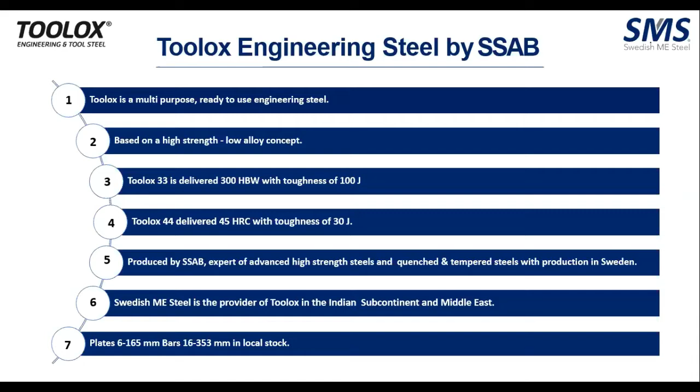So let's go into the process. Toolox has been manufactured not based on ingot casting or electric arc furnace. We have been using virgin material and blast furnace. So the quality of the process is intact from the start.

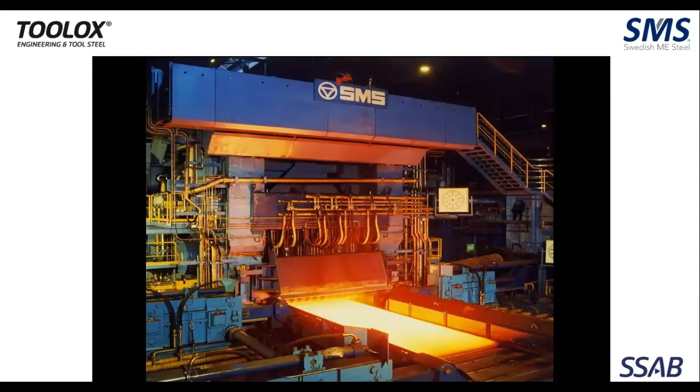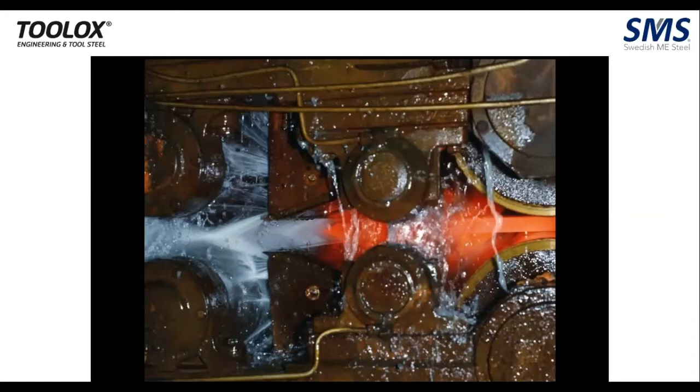This is the slab coming out of the rolling mill, and this is where the entire R&D of Toolox lies. When we say Toolox is from 6 mm to 165 mm, the entire plate thickness is being rolled. No block of Toolox is being forged. Every item, the plate and bars up to 353 mm, it is all rolled plates.

So what you get out of Toolox is guaranteed toughness and chemical composition.

This is where the entire R&D of Toolox manufacturing happens. You can see the red hot condition slab comes out and it changes to room temperature within a matter of seconds. For various thickness plates, the amount and quantity of water to be quenched at what angle, at different quantities, defines the properties of Toolox. That's where the entire R&D happens.

As we have already said, you have a material which is pre-hardened at 45 HRC, with high toughness as well as high tensile properties. It can be used in a wide range of applications. Of course, today our focus is mainly going to be in the range of plastic molds.

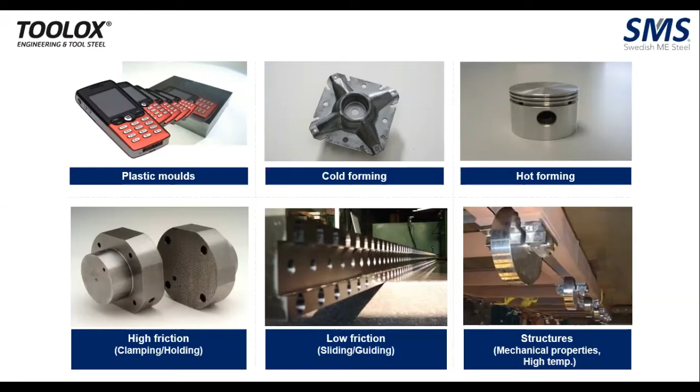When you machine a normal P20 block, the amount of carbides is 10%, whereas in Toolox 33 it is almost half, only 6.4%. This helps you because if you're using the same tooling as for P20, with Toolox you can either increase your milling speed by 40%, or keep the speed constant and increase the insert life.

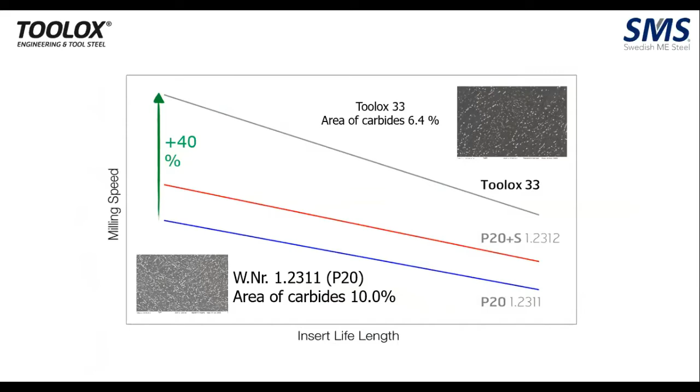Now we look into what we need to do regarding manufacturing time when you manufacture an H13 insert and then use Toolox 44 instead. When you manufacture an H13 insert from raw material to finished product versus Toolox 44, the definitive advantage is that it's delivered at 45 HRC, so there's no two-time machining, annealed and after heat treatment. It's only one-time programming, you can directly go for your final CNC. Of course, with the metal at 45 HRC, the EDM time is very high.

But when you take the total time from raw material to finished product, you'll find you save at least 25 to 30% of your total manufacturing time. Adding to that, you'll save time in heat treatment as well as the treatment cost involved.

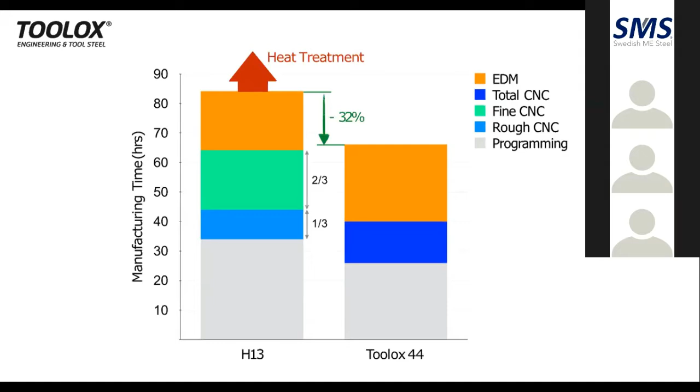This gives you a representation of the two grades compared with a regular P20. Toolox 33 can work against your normal P20, and Toolox 44 can replace your H13, your D2, or any hot and cold working steel you think of.

As we have been repeatedly saying, the properties given on behalf of Toolox are guaranteed. I don't think any other supplier guarantees mechanical properties of the material. So we at Toolox take great pride in saying that.

It comes with ESR properties as standard. Toolox 44 is an ESR property material. You can see the carbon equivalent of the material is very low, the lowest, bottommost row, which states the lesser the value of the carbon equivalent, the greater your material's ability to adapt to both welding and thermal cutting. This makes your maintenance very easy. That's the whole point behind it.

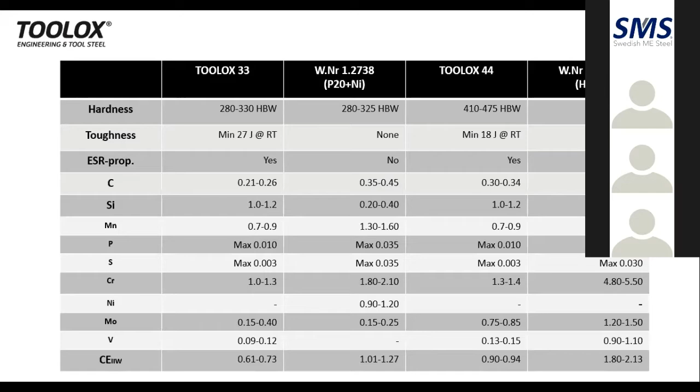When we say that Toolox is delivered at 45 HRC and no heat treatment is required, there's always a doubt or curious question of how you'll be able to machine it being at 45 HRC. Yes, those kinds of doubts, I think, will be clear after seeing these machining parameters and videos. But if you use the recommended tooling that you're going to see, we are rest assured you'll be able to overcome this machining block that you have in your mind.

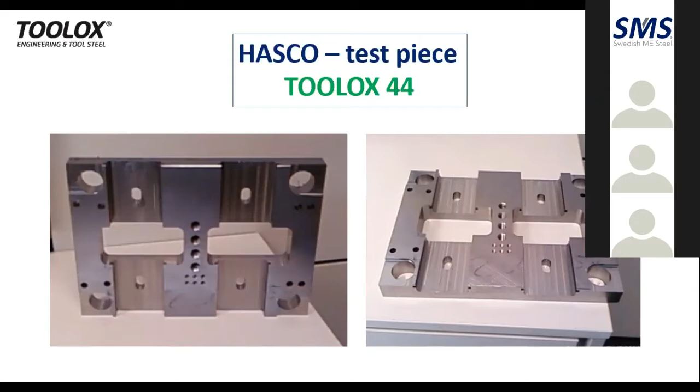This is the Hasco test piece. Hasco, as many of you know, is a prominent mold-base supplier in Europe, and they have placed Toolox in their own brochure. You can just Google Hasco and Toolox, and you'll find that Hasco recommends Toolox in their own brochure. This is a test piece that Hasco has done, and this is the comparison they make.

When they compare a normal P20 with a regular Toolox 33, even though you buy the material at 40% more cost, the final total cost after 70 hours of machining shows that the total machining hours is still cheaper than your regular P20.

Toolox is an internally stress-relieved block, so there are no internal stresses in the block. Whatever extensive machining you do with the Toolox block, it doesn't get work hardened and it comes out in the form of chips. So even after extensive machining, no stress relieving is required.

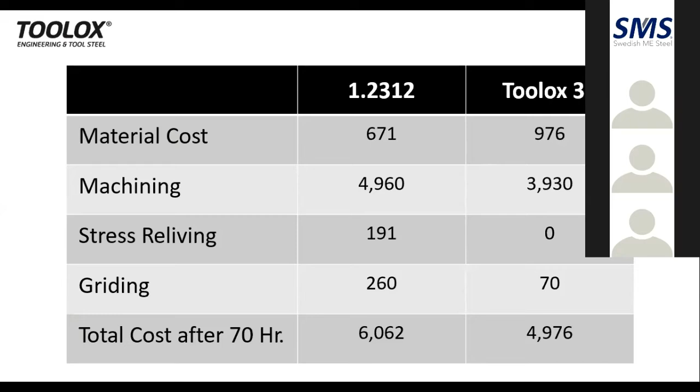These are some of the machining results of Toolox 44 while machining the 45 HRC material. They say milling with average speeds for hard milling is possible, long hole drilling is possible, and the test piece was absolutely stress-free -- the point we stressed in the previous slide, which Hasco also concurs with. Usage of the right tools for hard milling is necessary, so if you use the right tools, you will not face any issues machining Toolox.

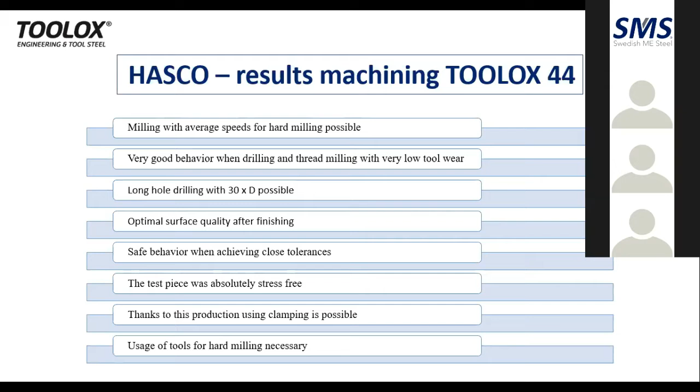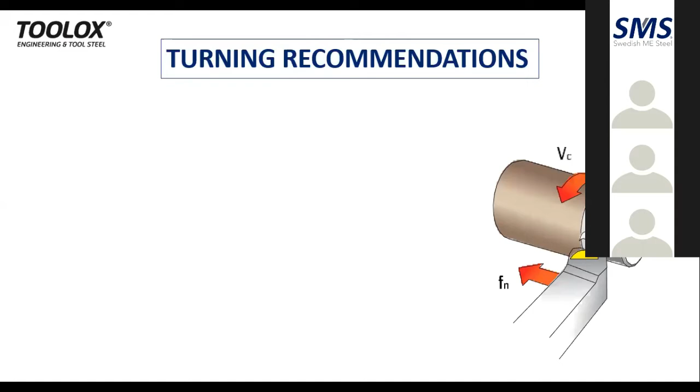So let's turn to some of the turning recommendations. We have our own machining brochure, developed by SSAB, taking into consideration all participants across the globe. Let's see some of the parameters which can be used as optimal values, both minimum and maximum, so you can do trial and error and achieve your optimal result.

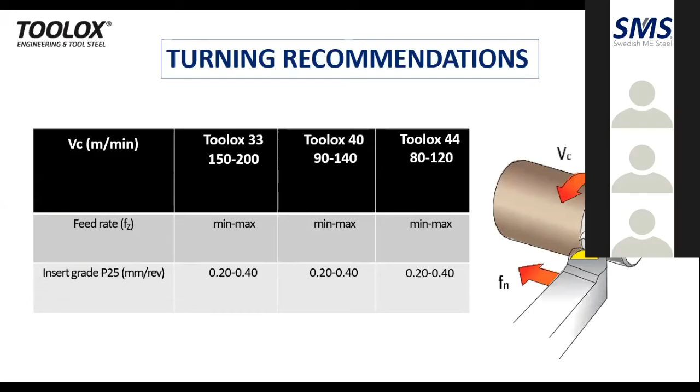So some of the turning recommendations, and some tapping recommendations for both blind holes and through holes. For tapping, we recommend from M5 to M20. Below M5, we recommend thread milling -- we don't recommend tapping for that.

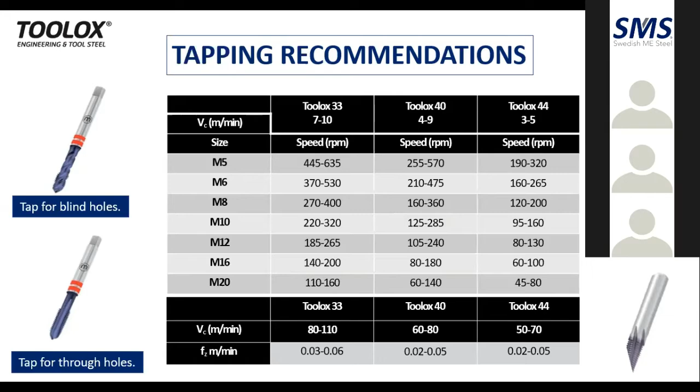Tools for drilling - when you see names like Sandvik, Seco, it's not necessary that you should go for these standard makes. You can ask your regular tool supplier to match the nomenclature of these grades, and he'll be able to suggest or give a replacement. It's not necessary that you need to use the same manufacturer.

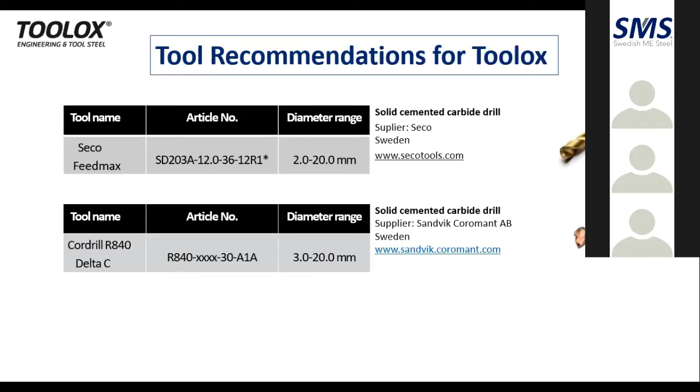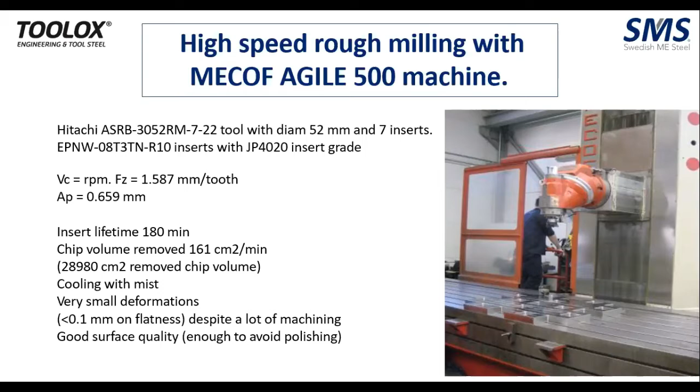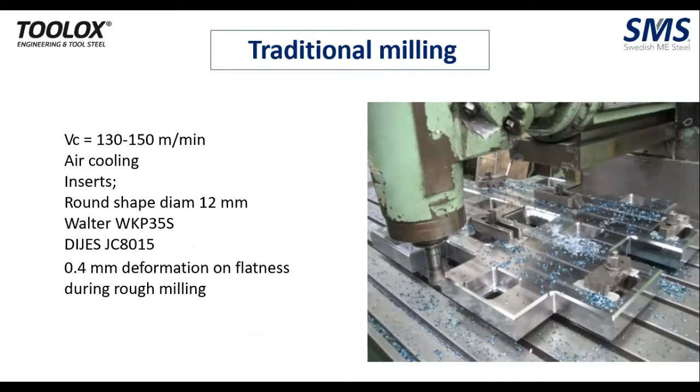This is a locally made video in Pune, made by one of my colleagues. Sorry for that.

I say that you don't always require expensive tooling to do the machining of Toolox. As we have been saying, Toolox is easy for maintenance, and it can replace your H13 and D2. Have you ever come across a tool steel where thermal cutting can be done as easily as this?

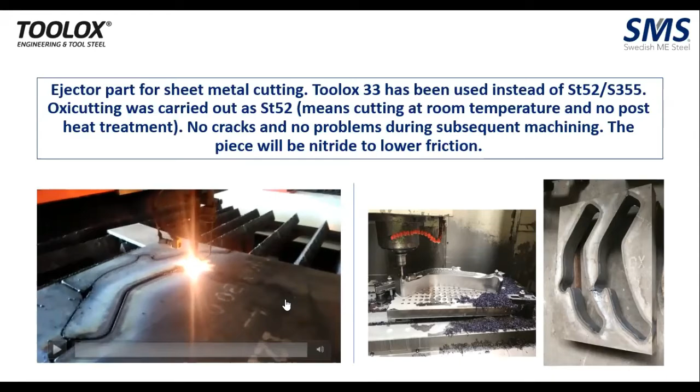So if there is an insert that needs to be made, you need not take a square block and machine it entirely. You just cut your required profile and machine out the heat affected zone. That's where the capability of the material lies in a lot of areas - even when you have some machine component to make, you can just cut it, take it, machine it, and put it into use.

That's the thing - Toolox is also an excellent substrate for surface engineering. So if you say your metal needs to be 45 HRC, no, I use H13 or H13S or D2 at 50 HRC or 58 HRC - what should I do? Need not worry, we always have a solution.

So the base metal is at 45 HRC, which we are discussing now. You can do any kind of surface treatment method available - nitriding, PVD coating, induction hardening, as well as laser hardening. What you can achieve through nitriding is 65 HRC. With PVD coating, you can achieve 70 HRC. In induction hardening, you can achieve 55 to 57 with a case depth of 2 to 4 mm.

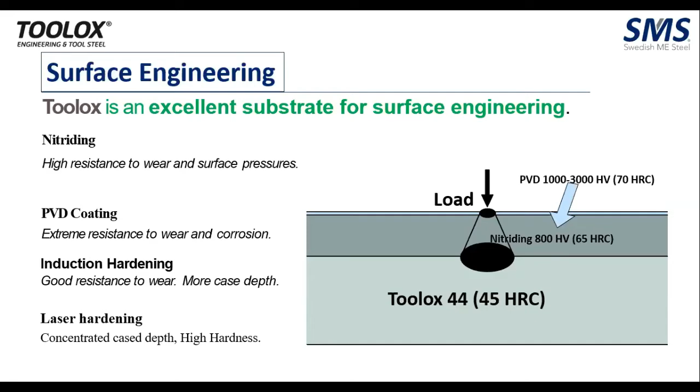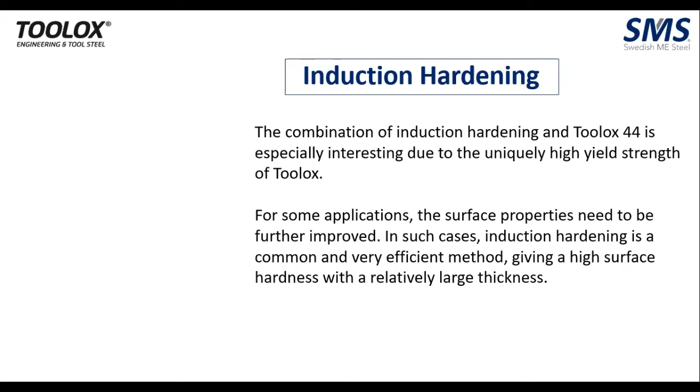Since the yield strength of the metal is very high, the combination of Toolox 44 and induction hardening is very unique. It can be used in various applications where wear is very much required with different types of plastics. So induction hardening can also be one approach - hardness achieved is 55 to 57 HRC with a depth of hardness from 2 to 4 mm.

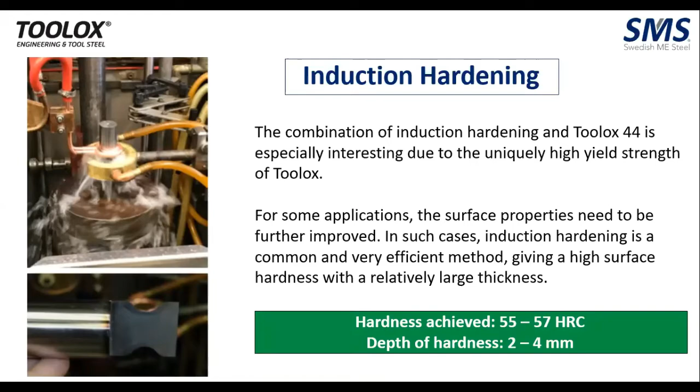So we have done the procedures for induction hardening at Toolox 44. We have done induction hardening even at Toolox 33 grade. This is a small video for that.

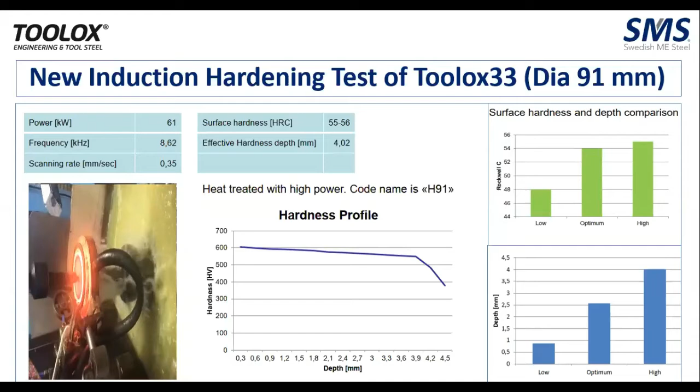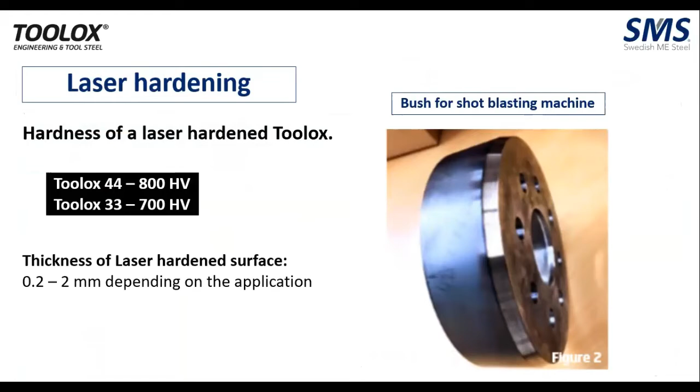So let's look at the different applications for plastic mold.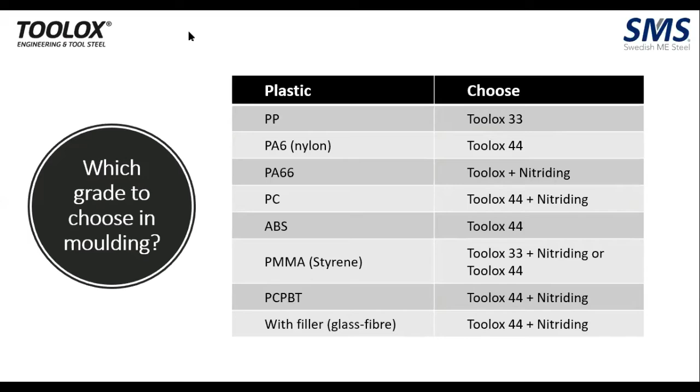So this gives you, as we said, depending upon the life which you want and the feature you are looking to achieve, you can use Toolox grades for that.

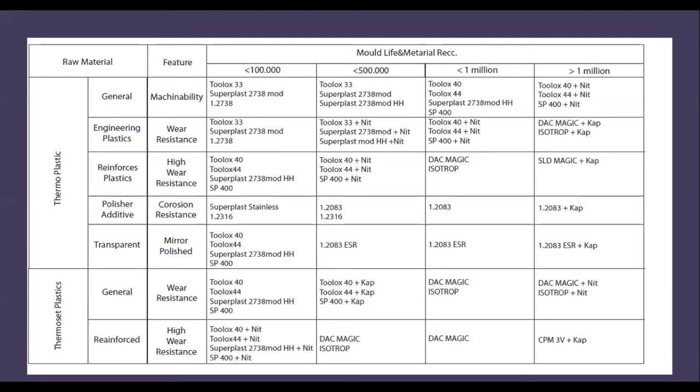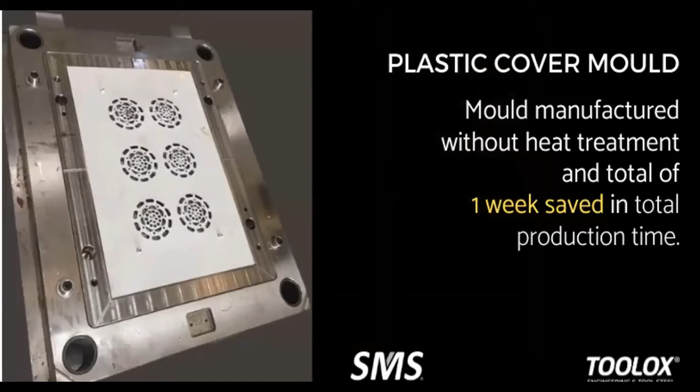So this plastic mold cover has been made in India - mold manufactured without heat treatment, total time of 1 week saved in production, as we already discussed.

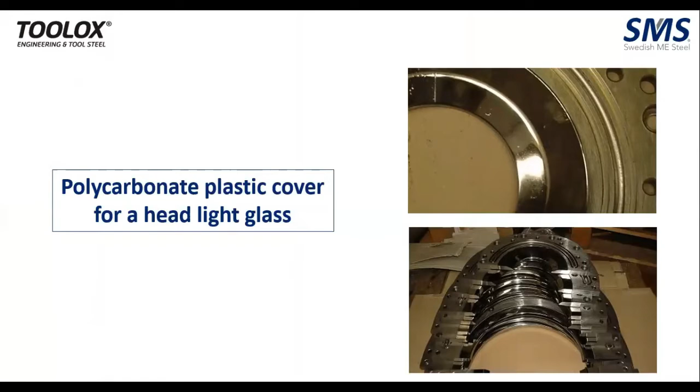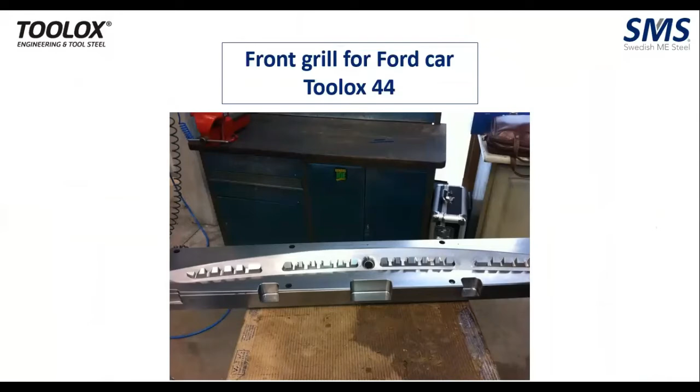Front grill for Ford car - Toolox 44 being used.

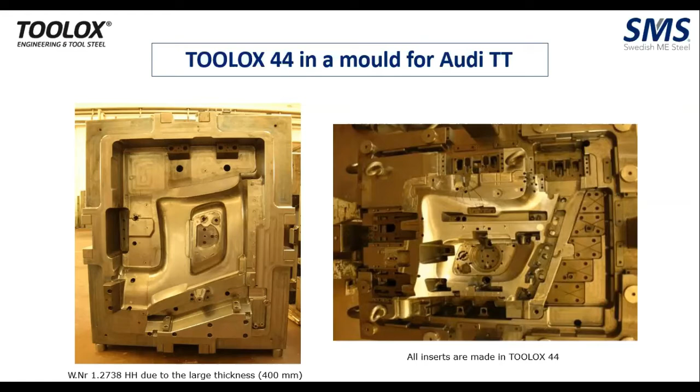This is a mold we supply to Audi, and this was a special requirement from them - it was a specially made block of Toolox 44 exclusively for them. No problem, it gave the desired results.

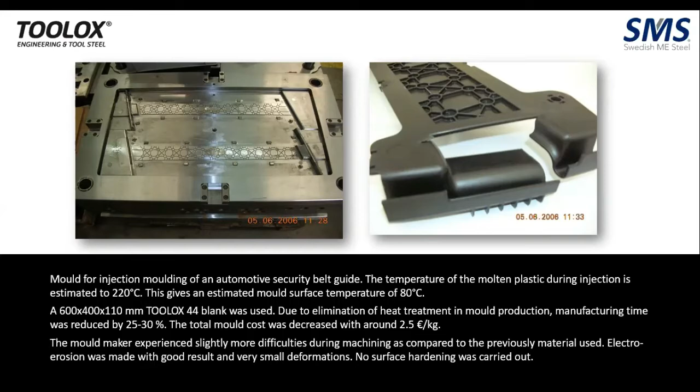So Toolox, as we said, can be used against your hot working tool steel as well as your cold working steel. Toolox is tempered at 590 degrees centigrade, so handling high temperature is not an issue for Toolox - it has been designed on that front.

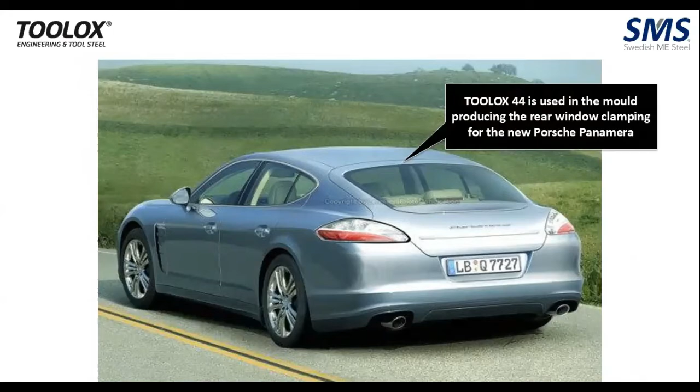Toolox 44 is used in the mold producing the rear window clamping for the new Porsche. This is the design which has been used.

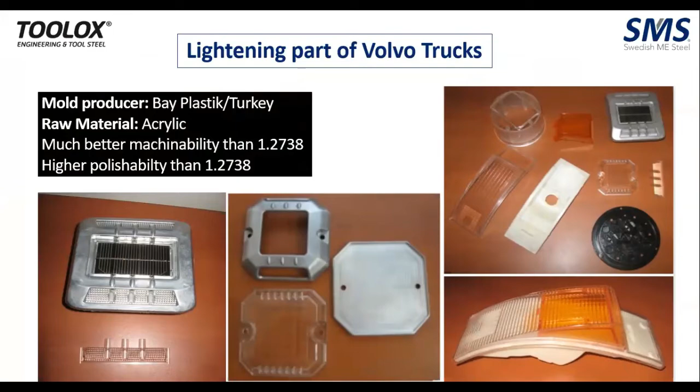Lighting part of Volvo trucks - higher polishability than 1.2738.

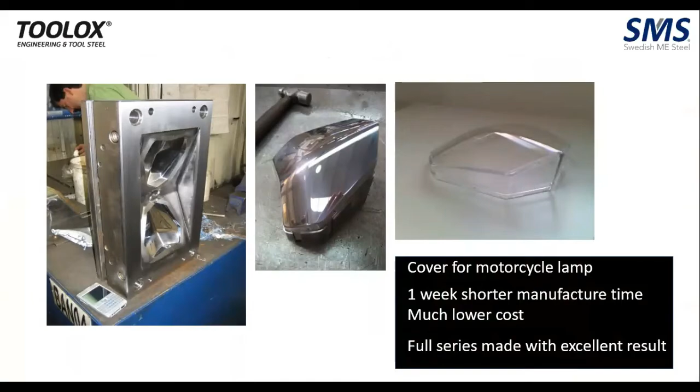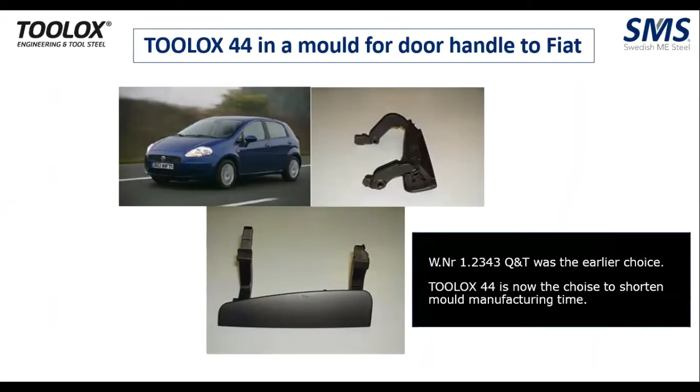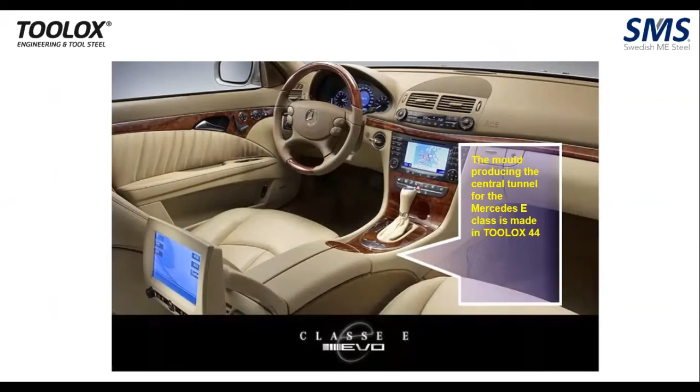The central tunnel of Mercedes E-Class has been made with Toolox 44, and this gives you another idea.

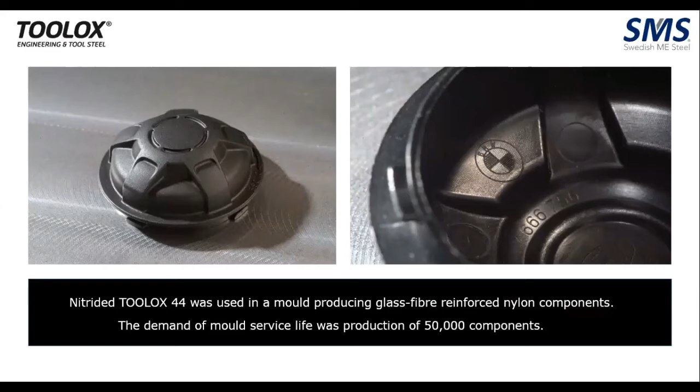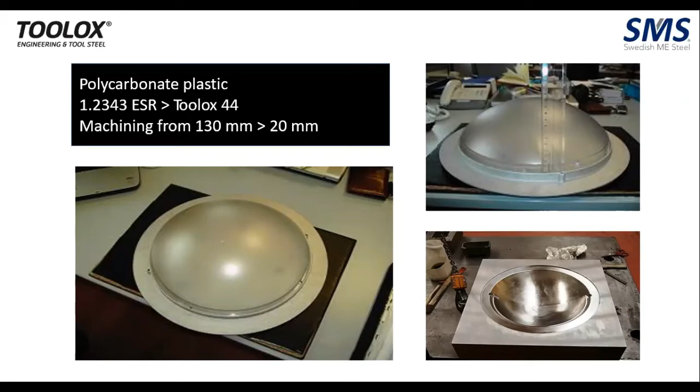Here's an interesting thing - the material being molded is polycarbonate plastic, but you can see the machining was done with Toolox 44 with a 130 mm block, with the inner depth going up to 20 mm. Throughout the block what you have is through-hardened material, so there's no question of the hardness reducing as it progresses through the center. It's 45 HRC throughout the corner, each and every corner of the material.

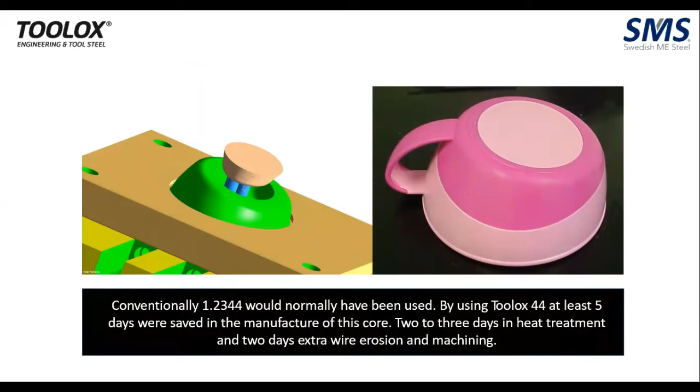Conventional 1.2344 material being used was replaced here with Toolox 44. 5 days of production time was saved during this.

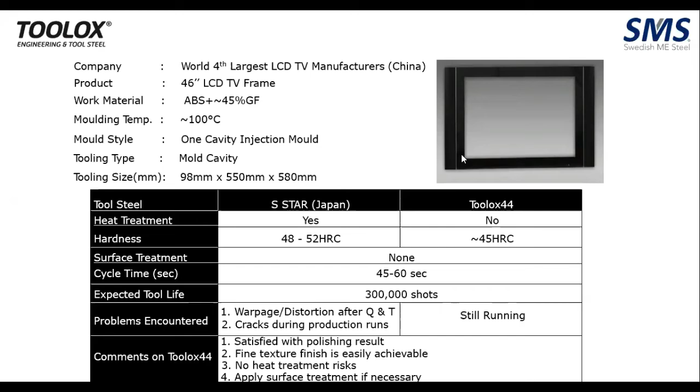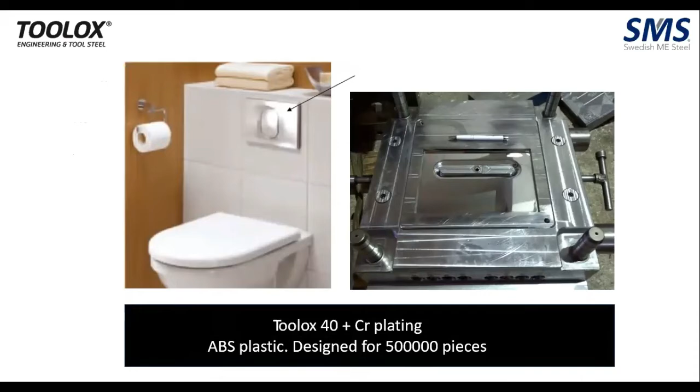So this is Toolox 40 plus chrome plating. ABS plastic is being used, and it has been designed for 5 lakh components.

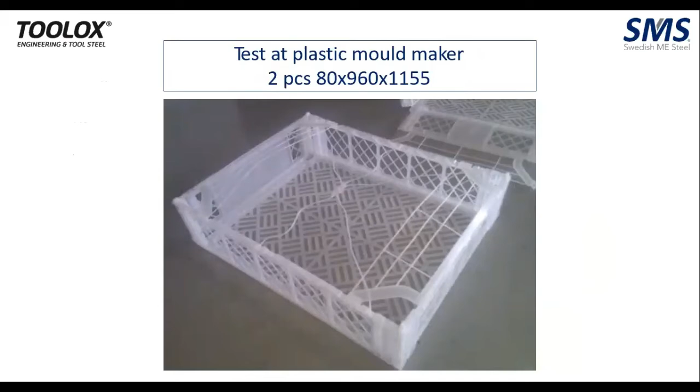One more Toolox 44 material being used in this particular mold. Plastic mold maker testing this. Our only limitation is that Toolox is available only from 5 mm to 130 mm thickness.

Our plates are being manufactured from 2 meters by 6 meters, so length and width is not an issue. As you can see, 2 pieces are being manufactured with a cross section of almost close to 1 meter by 1.1 meter.

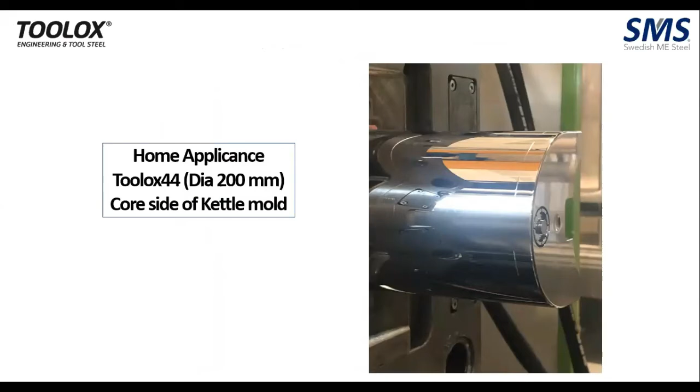Home appliances, Toolox 44, dia 200 mm, core side of the kettle mold being made. Again, for one more plastic with glass, 45% glass fill.

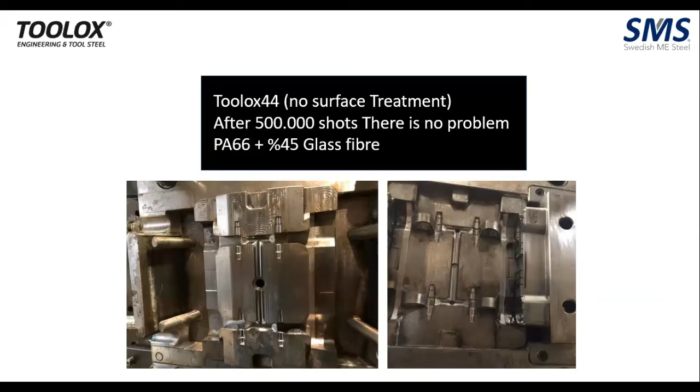So whatever materials you have within you, your pre-hardened P20, P20HH, H13 or H11 which you use for inserts, or sometimes even your cold working steel such as D2 for high abrasive material, for all combinations of material, if you use the application wisely, one grade of Toolox 44 can serve your purpose. That's the beauty of this product.

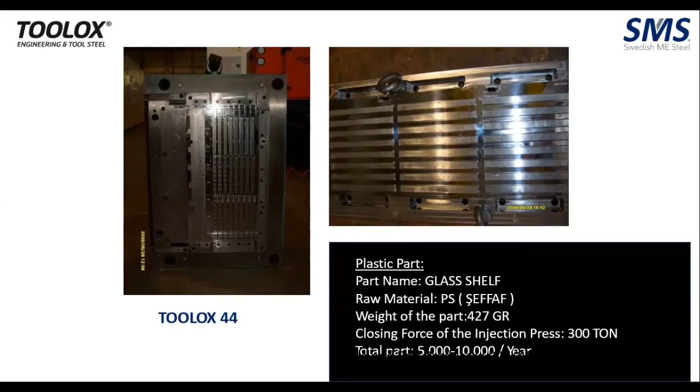One more application wherein the plastic part being made is a very heavy, transparent part. The closing force of the injection is 300 ton, and total part produced is relatively less, 5,000 to 10,000 pieces per year, which we already shown.

It's not only the automotive segment that it's useful for—automotive, home appliances, healthcare, you name it. Wherever you have a thought process of making a plastic molded material, Toolox can always come into your mind, saving your time, energy, and fast production of molds.

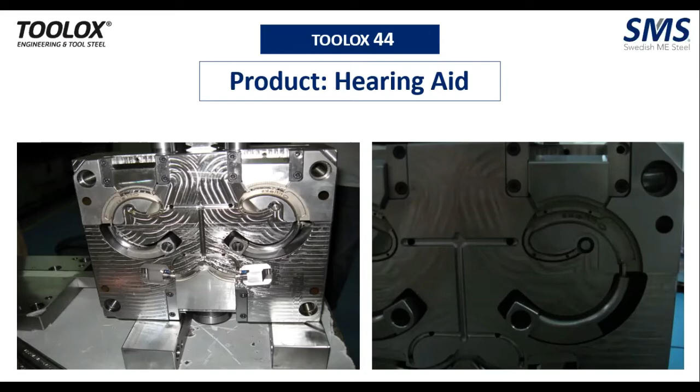So we come to the end of our webinar, wherein, if you see the key takeaways, you can say that the quality of the manufacturing process we have produced uses modern manufacturing techniques, and you get out 45 HRC ESR property material.

As we said, it is delivered at 45 HRC, and though there is no heat treatment required, it saves money and time. You can say that in its pre-hardened version, it can act not only as your P20, but it has worked across the globe acting as a pre-hardened version of your H13, H11, as well as your D2.

That is, it serves as a pre-hardened version of both your hot working as well as your cold working tool steels. So we've also seen case studies from across the globe, and we'll finish off with one more video of machining, which we'll try to show.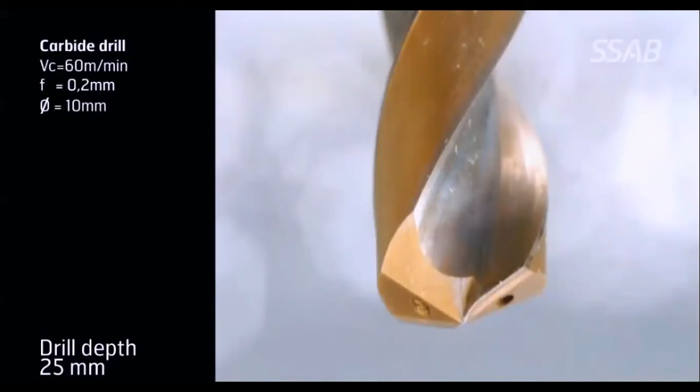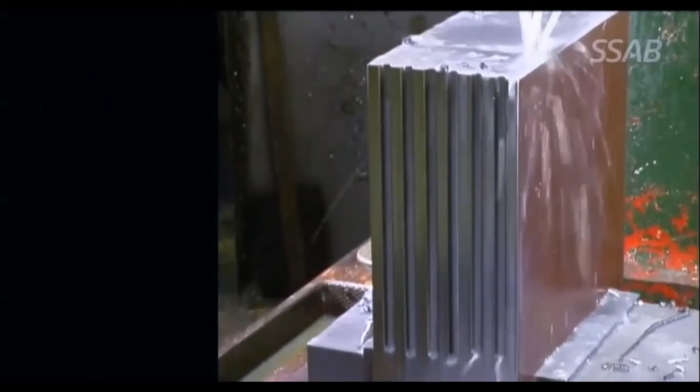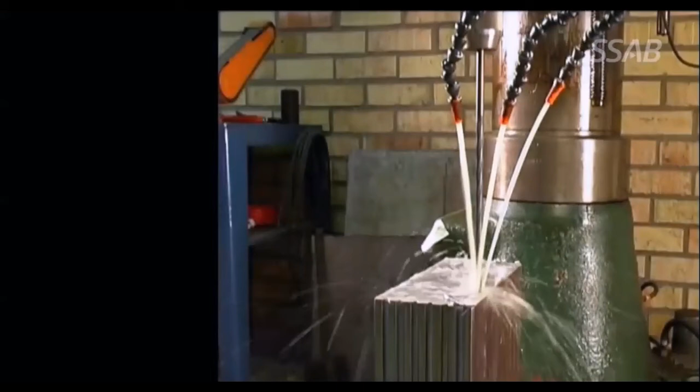So here a carbide drill is being used, a 10 mm drill bit. Even long hole drilling is very much possible, provided the required tooling is being used.

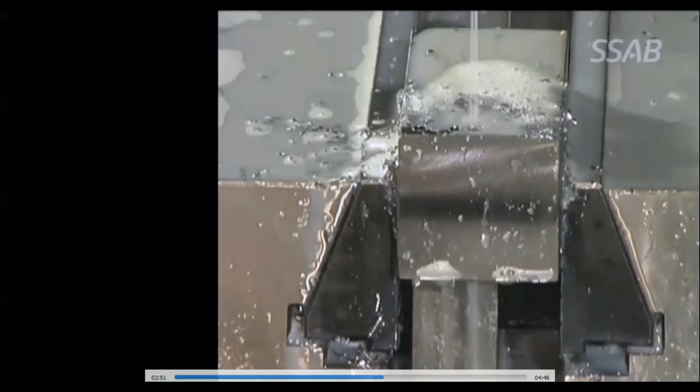So even smaller holes can also be done, no problem. As we showed during the Toolox machining demonstration, it starts from 2 mm. Here we have drilled a 3 mm hole, long hole drilling being done.

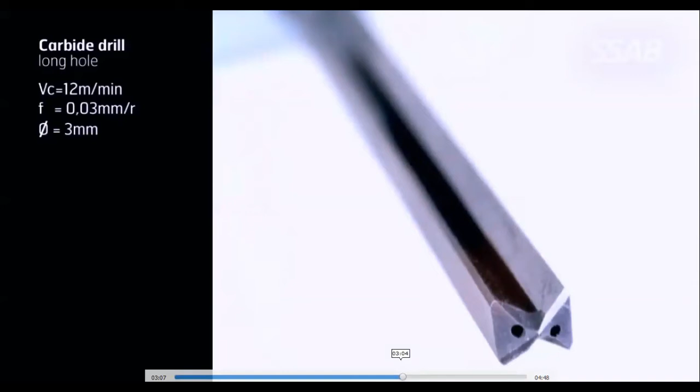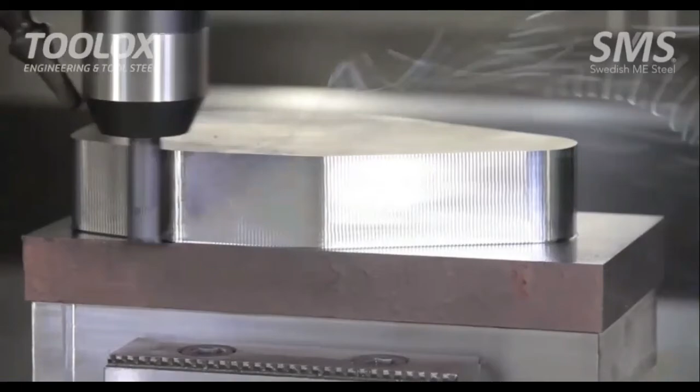You can see how fast the milling is being done and the shininess of the material thanks to its ESR properties. It is aesthetically very good, so you will be able to differentiate between Toolox and other traditional steels just by looking at it.

So even after your extensive machining, there is absolutely no requirement of stress relieving in this.